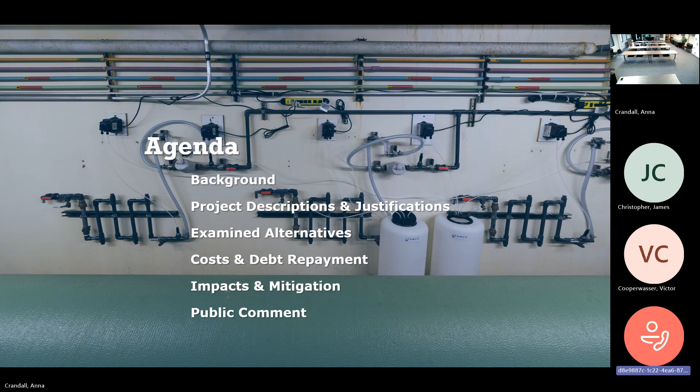So stepping into this, we've got a brief agenda in front of us today. We'll talk about the background of this project, some project descriptions and justifications. We'll talk through our examined alternatives, and we'll focus on cost and debt repayment, as well as the impacts and mitigation. We'll also have opportunity for public comment if we're joined by any audience member.

So some broad background: the city is applying for drinking water state revolving loan funds, which is a low interest loan financing program that will allow the city to fund or finance important updates to water infrastructure. This is a federal program administered at the state level, and to be considered for this program, we must submit a project plan. So that's the activity we're embarked upon.

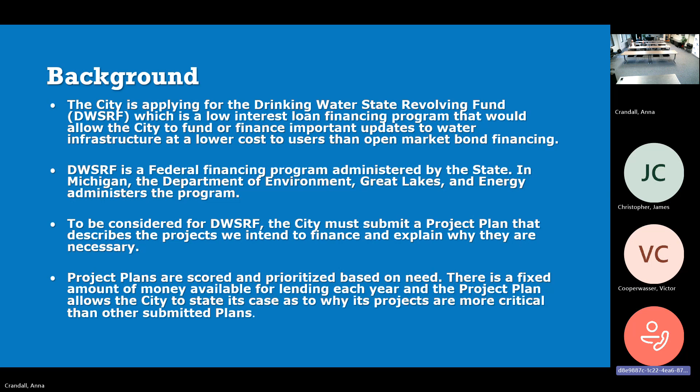Now this project plan is available. We reference it; it's available online and at the city clerk's office, and this public meeting and presentation is part of that project plan. That project plan will then be submitted to the state, scored and prioritized based on need. There's a fixed amount of money available for lending each year, so it's important that the city submit the project plan and that we're competitive against other cities across the state of Michigan.

Sorry, I think I skipped that. All right, back on track here.

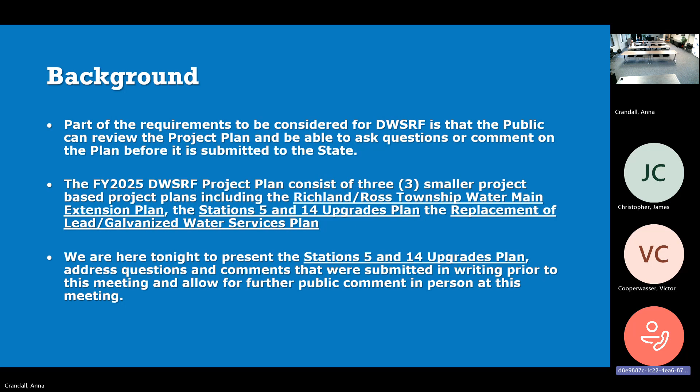Sorry about that. So again, part of the requirement to submit the DWSRF project plan is that the public can review and comment on the plan, so that's one of the reasons why we're here tonight. I did want to note that this DWSRF project plan submittal for fiscal year 25 includes 3 projects in total: the Richland Ross Township Water Main Extension Plan, the Station 5 and 14 Upgrades Plan, and the Replacement of Lead Galvanized Water Services Plan. Tonight we're going to really focus on the Station 5 and 14 consolidation treatment plan.

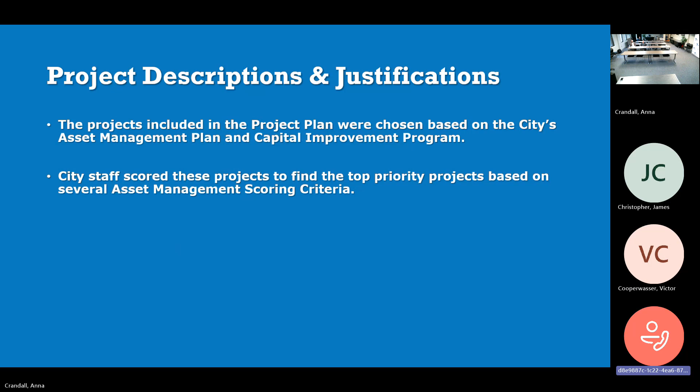The projects included in the project plan were chosen based on the city's asset management plan and capital improvement program. City staff scored these projects to find the top priority projects within our asset management plan and within our capital improvement plan. So these projects represent the most important projects to the city within our capital improvement plan.

When I say PFAS, I'm referencing PFOA, PFOS, PFHXS, PFNA, PFHXA, PFBS, and GenX compounds as well.

Michigan has enacted an MCL in August of 2020 to set and establish maximum contaminant levels by law. The EPA has just recently announced an update to that, so EPA now has more stringent enforceable MCLs in place. With the more stringent EPA MCLs in place, Kalamazoo is in exceedance of the PFOS requirement by EPA. That EPA requirement under the enforceable MCL is 4 parts per trillion for PFOS, and at Station 14 the highest average result is 4.2, so slightly above that.

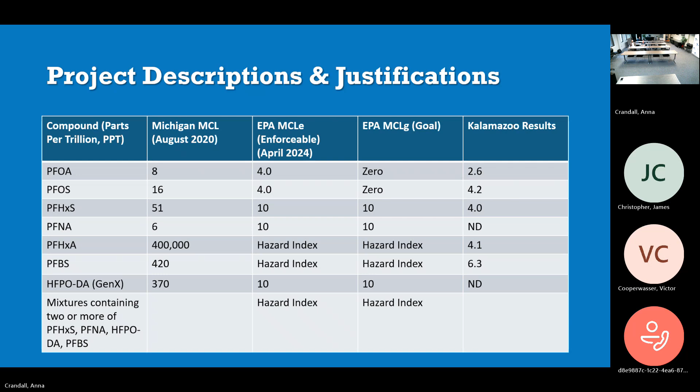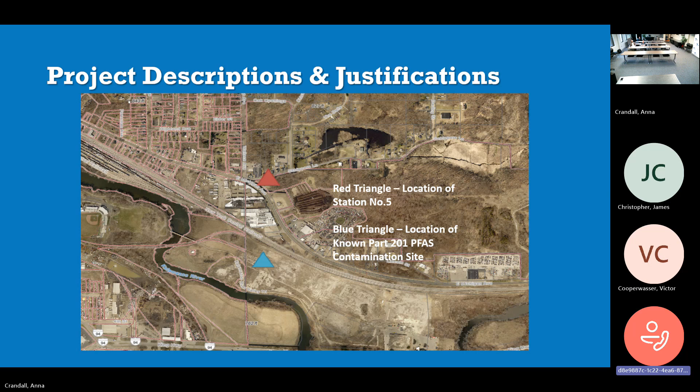So as you look at these two previous slides, you've got an understanding that Station 14 is currently in exceedance of the EPA requirement for PFOS. You also see that Station 5 is within 1,000 feet of a known Part 201 PFAS contamination site. So with that, we've got both demonstrated facts and future concern for the water quality and reliability of Station 5 and 14.

Well, we'll get some more justification in terms of timing and overall system need. Station 5 was constructed in 1914, is due for replacement. We're now in 2024, so that station has been in service for 110 years, certainly due for replacement. Station 14 was constructed in 1958, it's also due for replacement.

Again, Station 14 production water exceeds the new EPA PFOS requirement by MCL. Station 5, again, is located within 1,000 feet of a known PFAS contamination site. Station replacement and treatment are needed at both sites.

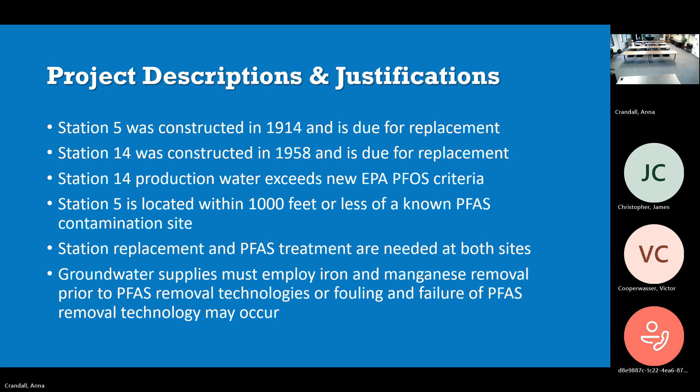And we also wanted to note that groundwater supplies that have iron and manganese present must be removed prior to PFAS treatment. That's due to fouling or failure of the PFAS removal technology if the iron and manganese is not removed from the process first.

Continuing on the discussion of project justification, Kalamazoo is a system. I referenced Kalamazoo Public Water Supply, WSSN 03520. Essentially, that's the Kalamazoo system. It's the regional system that covers the entire metro area of Kalamazoo, including many of our neighboring townships.

This system was built and expanded over the years following a model of resiliency and reliability through redundancy, meaning that we had many stations that could contribute flow into the system, and any one of those stations could be taken offline, and the system was reliable because of the overall redundancy.

However, as we fast forward through changes in regulatory standards, including Michigan's lead and copper rule, PFAS regulations not only from the state of Michigan but now from EPA, as well as local level service demands, this has all changed in terms of water quality. Our ability to control the accuracy and precision across many redundant, often functionally obsolete stations has now contributed to reduced reliability.

So as we have many stations, the water quality has variability across those stations. Those stations lack modern treatment technique. They also lack controls and optimization. And so our ability to control those stations with the precision needed to comply with Michigan lead and copper rule, as well as Michigan and EPA criteria for PFAS, has become increasingly challenged.

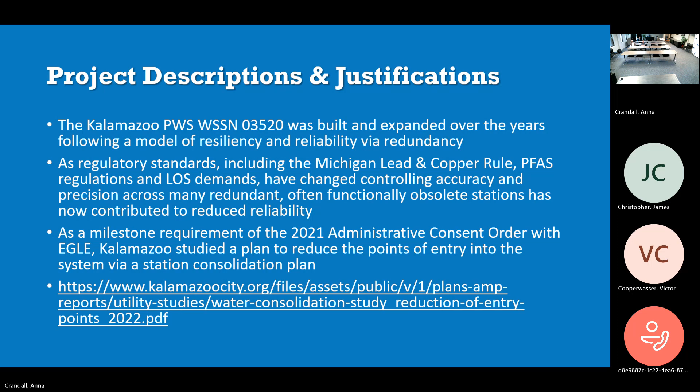Again, a milestone requirement of our administrative consent order with EGLE in 2021 was to study a plan to reduce the points of entry into the system via a consolidation plan. In the statement I read earlier, we talked about Kalamazoo with 13 point of entry treatment stations. That is already reduced from where we were a few years ago. We had started with 16 stations as recently as 2019, but those stations were taken offline due to PFAS risk within the capture zone of those stations.

So let's talk about the proposed station consolidation and treatment plan. We described this in the alternatives: we could have station treatment at 14, we could have station treatment at 5, so two independent treatment sites to treat both iron, manganese, and PFAS at each site independently. However, that was deemed costly, and also deemed to be not in line with our consolidation plan.

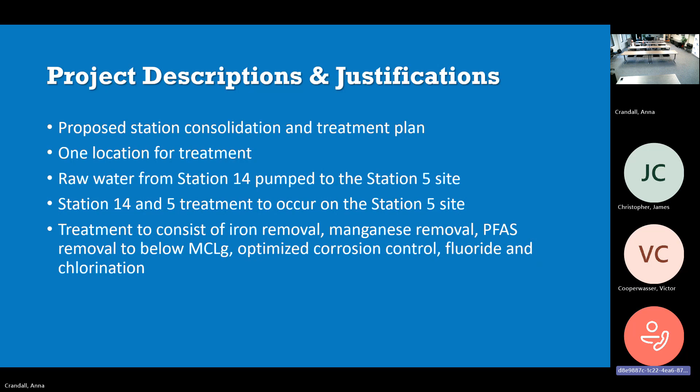So the proposed project would consolidate the raw water from 14, pump it over to Station 5, and then together the raw water from both 5 and 14 would be treated at the Station 5 site.

This slide shows you that route from on the left where you see the lake that's near where Station 14 is, and then that would flow to the south, which is to the right. So sorry, the lake is on the left. The flow would be to your right, which is to the south to go to Station 5. So that red polygon on the right side of the sheet there along East Michigan and Skipper's, that would represent the site for Station 5 consolidated treatment. Where you see that lake, Spring Valley Lake, and that rectangle, that represents where Station 14 is at. North is to the left, south is to the right.

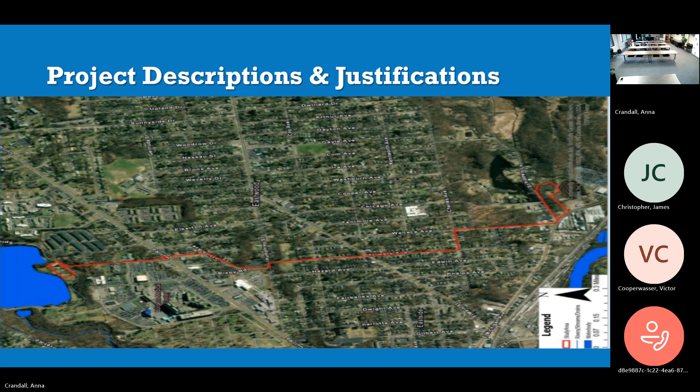So now we're zoomed in here, looking at this slide. This provides an overview pictorial image of what the consolidated footprint would look like at Station 5. You've got Lincoln Ave or East Michigan along the left side of the paper, and Skipper's Lane that runs across the top. You also have the city's leaf compost site below that, which is kind of imaged out.

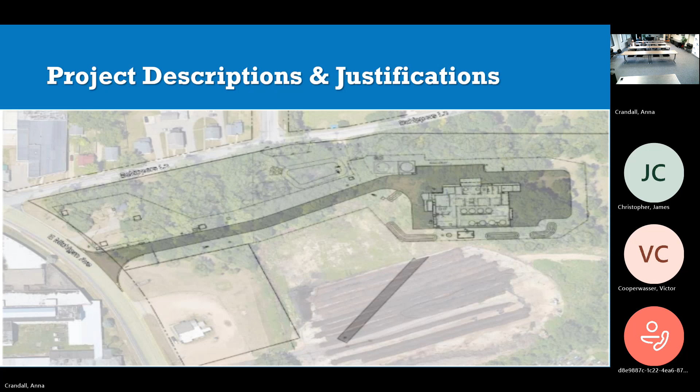So again, looking through the alternatives, no action was looked at. That was not viable. That would not improve water quality, and would not address iron, manganese, and PFAS, which we described to be water quality concerns. We looked to optimize existing systems, and the existing water supply system is performing as well as it can. Additional staffing, staff training, and operational changes are not likely to improve water quality. We need treatment, and the only way to get treatment for PFAS is to build it.

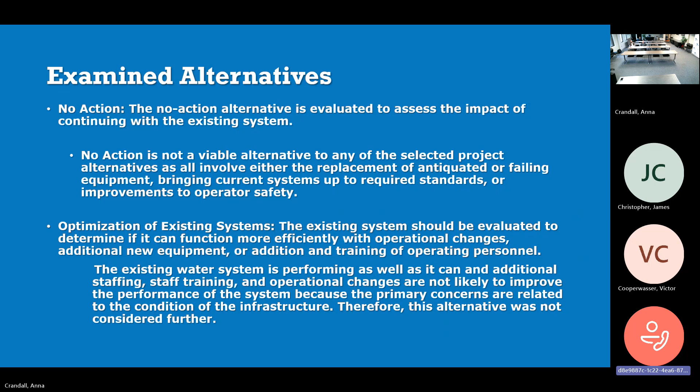Again, we looked at regionalization. Kalamazoo water supply is already a regional system, so there wasn't really an opportunity for us to partner with another community to address our treatment needs. This is something that needs to be addressed within the Kalamazoo system.

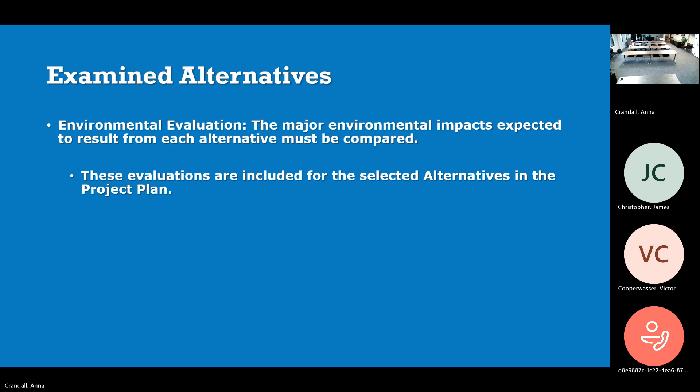We evaluated net present worth of all the alternatives to compare the lowest net present value over the 20-year planning period, which is included in the project plan. Many environmental evaluations were considered. Major environmental impacts are not expected to occur from this project. These evaluations are discussed in the alternatives section and located in the project plan.

Getting into the details of proposed costs, at this time we're estimating Pump Station 5 and 14 consolidated treatment upgrades to cost $51,304,000. We also summarized the cost of the other projects, including the Richland Ross water main extensions at $27 million, and Kalamazoo lead and galvanized service replacements at $13 million. The total fiscal year 2025 DWSRF project plan, including all projects, is estimated at $91,304,000.

Excuse me, a bit of a tickle.

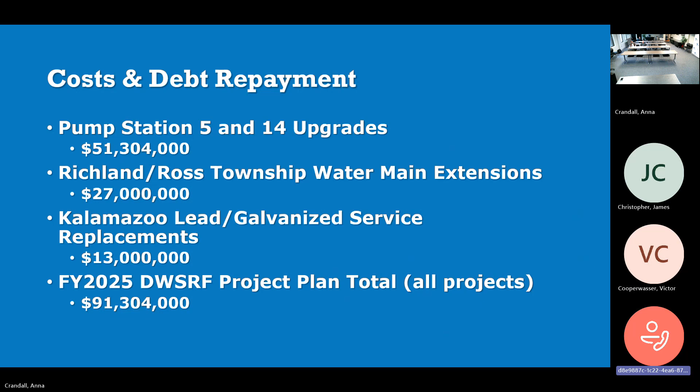Just going to talk about these projects and where they fit in with our overall debt service plan and capital improvement project plan. These projects are included within our long-range capital plans. Our current capital program anticipates annual rate increases in the range of 6 to 9%. That's just to give us some context of where we are in overall planning.

Certainly, we really need grant award and/or principal forgiveness for these projects. That would certainly help reduce the impact to ratepayers. The actual impact to households will be based on usage, and will depend on where we come in terms of funding opportunities if we are successful with this project plan request, and if we are successful in any state and federal grant amounts that may be applied.

So looking at this project and assuming a 20-year loan at 2.5% interest rate, the estimated rate increase would be about $7.94 per RU per month. Again, that's for the costs estimated for the Station 14 and 5 consolidated treatment. The actual cost would be based on usage and those other factors.

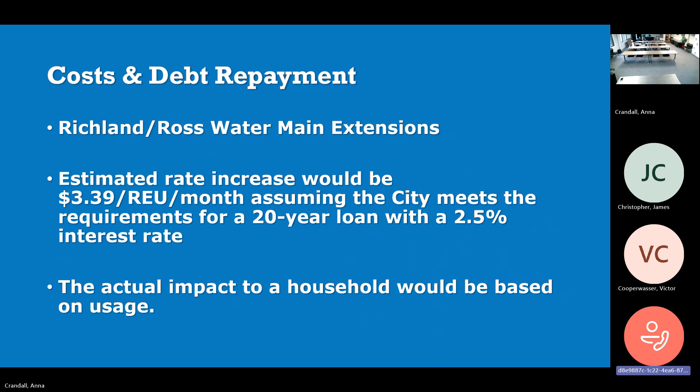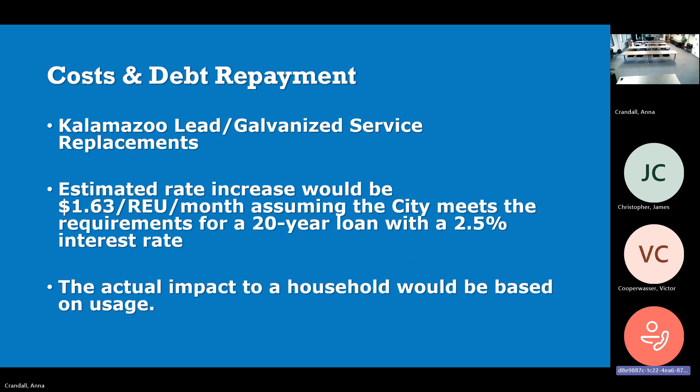We did also want to reference those other projects as well. The Richland Township and Ross Township water main extension would have an estimated cost of about $3.39 per REU per month. And the Kalamazoo lead and galvanized service replacement would have an estimated cost of $1.63 per REU per month. REU is residential equivalent unit, essentially representing the typical household cost on a monthly basis in accordance with this report.

So if we looked at all the fiscal year 2025 projects, including the Station 5 and 14 consolidation, the Richland Ross Township water main extensions, and the City of Kalamazoo lead and galvanized service replacement, the estimated cost would be about $12.93 per residential equivalent unit per month, based on a 20-year loan and 2.5% interest rate. We did note that the actual impact to a household would be based on your usage.

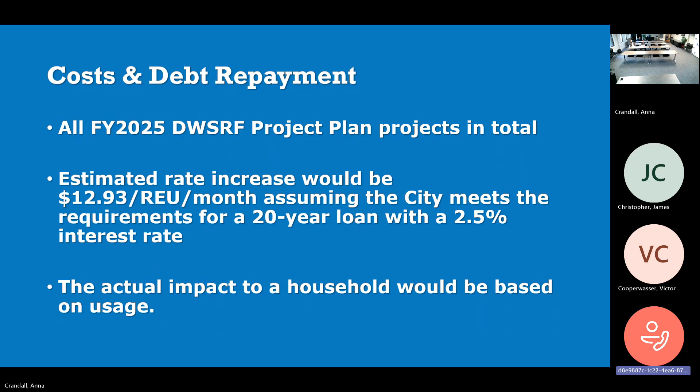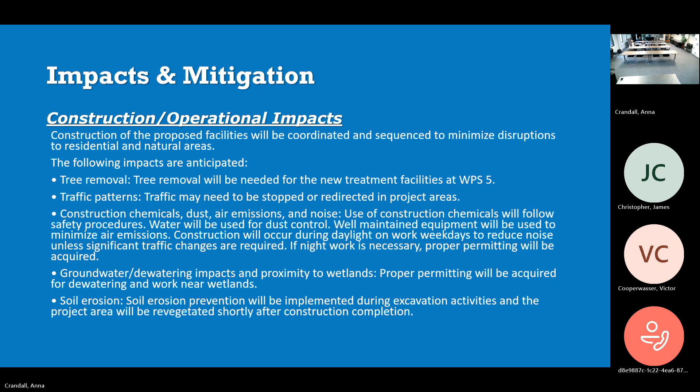Looking at some impacts specific to construction, we did want to highlight that this project will require tree removals. Tree removals will be needed for the new facilities at the Station 5 footprint. There will also be tree removals along the force main route that goes from Station 14, from that raw water pipeline, to Station 5. Construction may also impact traffic, dust, and other features, but that will get mitigated through soil erosion and sedimentation control permits, and other best management practices.

So at this point, I've concluded the presentation, and we'll have it open for public comment. Fortunately, we don't have anybody in the audience, so at this point, we're going to conclude the meeting.